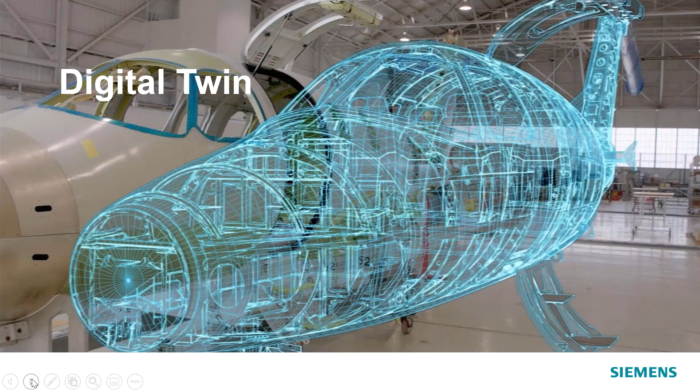They are able to do this by breaking down silos between the different domains and increasing communication, in particular, the mechanical and electrical domains.

Capital delivers a solution for the whole vehicle or aircraft lifecycle. On the left, you'll see it drives a full embedded software flow through to software running on ECUs in vehicles. On the right, it covers the electrical system design. It continues supporting engineers through harness manufacturing, engineering, and in-service publication creation.

Capital is data-centric and built upon a data and process backbone to enable extremely high levels of automation, data coherency, and integration with adjacent domains such as mechanical design. This electrical data management system enables the traceability and change and configuration management that customers demand. And because the electrical systems are part of a wider program lifecycle in organizations, we provide deep integrations into PLM systems such as Teamcenter and other necessary domains throughout the product development process.

With the exploding complexity of electrical systems, development happens in the context of model-based systems engineering. To deliver this, we integrate with other domains to deliver a truly integrated system development, including MCAD, PLM, and ALM systems.

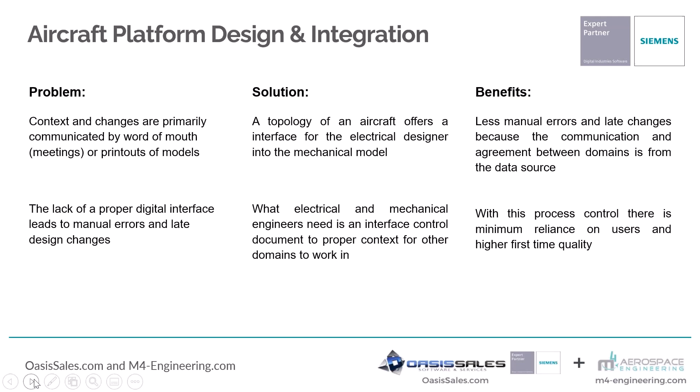Now that we understand the problems and what the solution should look like, we'll talk about how we can achieve this using the Capital software.

In Capital, we start with a system-driven design approach where we begin with nets or signals, and using Capital's automations easily create the wire abstraction. This includes the generation of harness-side connectors, including modular ones, which are becoming more and more prevalent in the aerospace industry. We then use these same wiring schematics and synchronize them to a 2D aircraft topology that allows you to reconcile differences between the mechanical and electrical design.

The topology abstraction allows an electrical engineer to work with the mechanical content within the context they understand and are most familiar with. This automation and correct by construction design ensures an optimum design process.

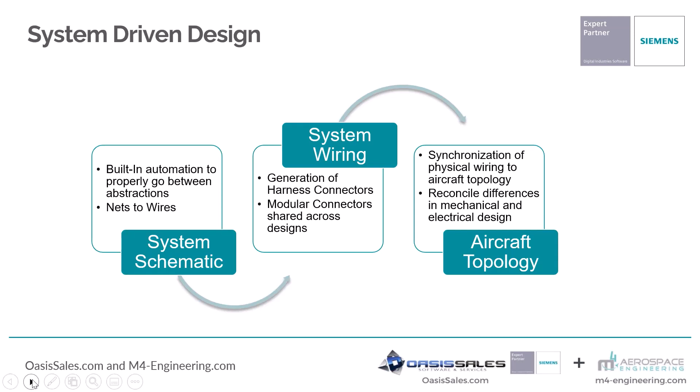Some of the automation capabilities used in this part of the process are the conversion of nets to wires, wire naming rules that allow you to auto-generate wire names based on given parameters, automatic creation of harness-side connectors, including modular connectors like I previously mentioned, and traceability of wires through different diagrams and systems.

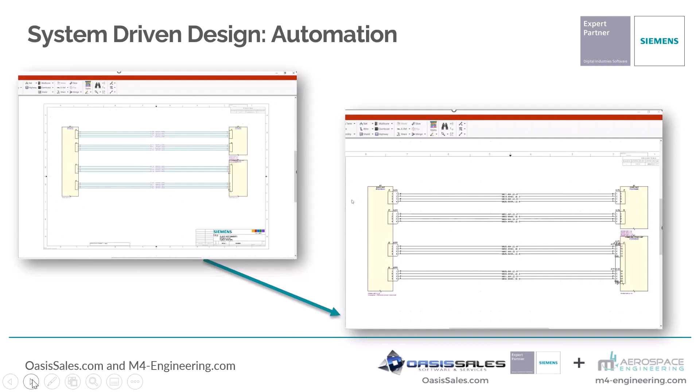These wiring schematics can then be mass imported into the topology, which we will see in a video during this presentation.

The next step in the electromechanical design process would be to sync the wire schematics with the 2D mechanical topology to validate the physical wiring.

Once we have the physical wiring schematics and we've synchronized the topology view, we need to feed back mechanical data, specifically inline connectors that might need to be added back to the wiring schematics. These are placed in the context of the physical aircraft, or any vehicle for that matter, and accurately added to the appropriate system's wiring schematic. We will see this in the following video.

Here we are starting off in the topology plane with a UAV aircraft that has been brought in from NX. The wiring schematics have already been synchronized, and we can see this by the list of wires on the left. We can also trace back to where these originated by tracing back to the physical source. This will take us back to where the wire originated, which is in the schematic.

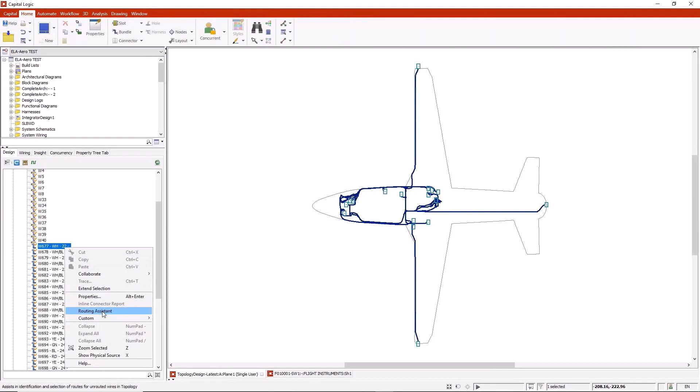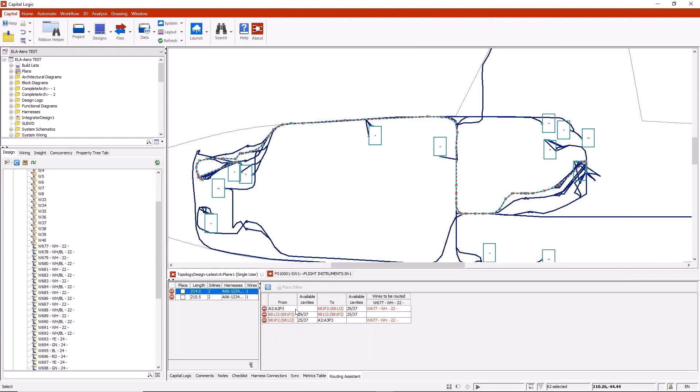Back in the topology plane, we can see that we can trace the paths of the individual wires. The list of wires on the left is a list of unrouted wires, but we can use our routing assistant, the dialog box you see pop up on the bottom, to complete the routing of these wires. Here it's telling us that the specific wire we've highlighted, in order to go from device A2 to A3, needs to travel through two different bulkheads or inline connectors.

We can also run the routing assistant on the connector pair itself to view all of the wires that need to be routed through the particular inline pair. There are actually 8 wires that need to route through the inline pair, so we can go ahead and complete the route for all 8 of them.

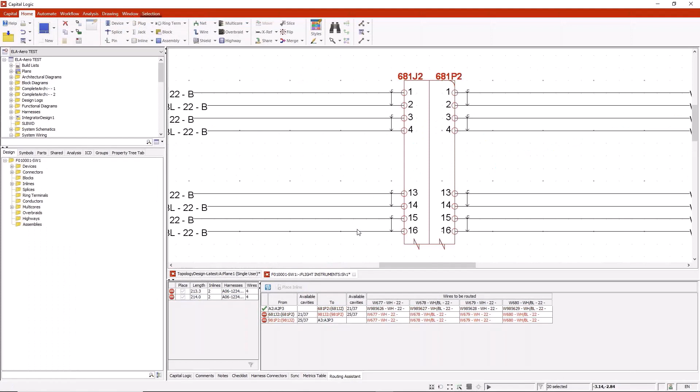We do this by choosing the Place Inline Connector button, and then the information is transferred back to the wiring schematics. You can see now that the inline pair we chose to route the 4 wires through has been added to the schematic. We know this is the correct path because we've seen it in the context of the aircraft topology.

Coming back to the topology plane, we can see there is another inline pair that these wires need to route through in order to complete their route. We can run the routing assistant on the connector pair itself to see what other wires need to run through the pair to complete their connectivity.

We can also run a connector report, which allows us to see the cavities we have available and compare them to the wires that need to run through the connectors to make sure we have enough space. We can also make sure we have the correct size cavities for the wire sizes that need to run through the inline pair. If we don't have enough space, we can communicate this to the mechanical engineer and either change the connectors at this bulkhead or add more inline pairs to create an alternative route.

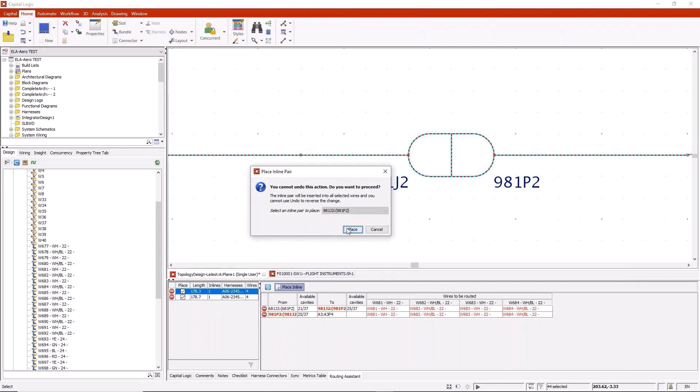Here we had enough space, so we can go ahead and place our inline connector back in the wiring schematic. Here you see the insertion view of the connector, and we can see what wires are going through each cavity. This is handy because, say you're routing a multi-core twisted pair, you can adjust which cavities the wires go through and make sure the multi-core wires route through adjacent cavities.

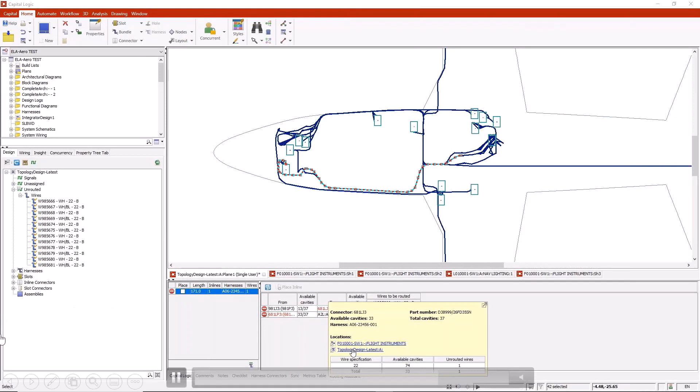Coming back to the topology view, after we've synchronized and updated the information from the wiring schematics, we can now see what wires are still left to be routed. Once we route the last set of wires through the last pair of inline connectors, the inline will be placed back into the schematic, just like we did with the other inline pairs, and we'll go ahead and complete the connectivity for all wires.

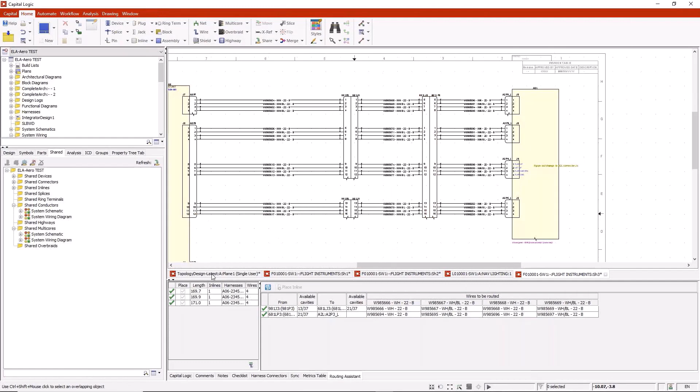Back at the schematic level, we can go ahead and clean up the schematic by merging any connectors that have been sliced up. For an electrical engineer, being able to work on the electrical connectivity within the context of the aircraft or vehicle makes it easier not only to update information, but also to communicate any changes required across domains. Back at the topology level, we see we have no unrouted wires, so we have completed our connectivity.

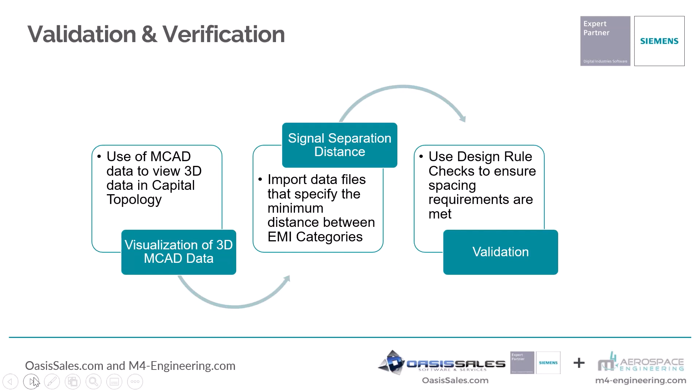Another capability within this flow is being able to view the relevant 3D data within Capital to aid in the visualization of EMI categories and better meet signal separation requirements.

We begin by importing a signal separation file with minimum EMI category separation distances. Then we can use the 3D viewer for signal separation to be able to see the other plane. With the use of the minimal distance file, design rule checks will show if any of these are violated, meaning if there's a wire traveling along a bundle that does not allow it to meet the EMI specification distance.

Viewing these results in the output window, which is interactive, takes you to the specific path violating the rule, allowing for easy manipulation to reroute wires, just like we saw in the video before.

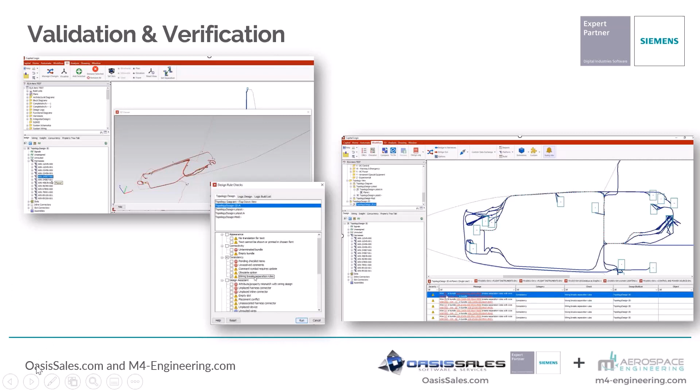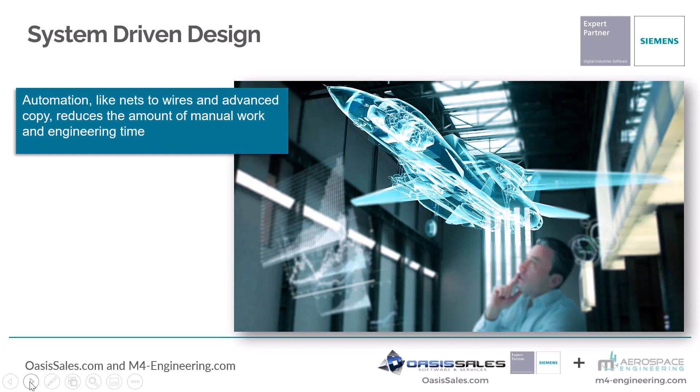All in all, what we are really doing is establishing a full digital thread throughout this flow. We are able to collaborate better, access data more efficiently, and make well-informed decisions to accelerate the development process. By creating the digital twin, we are able to iterate designs, thus improving first-time quality without increasing cost. As you saw, we are able to get a complete idea and validate without ever going to manufacturing, reducing the chances of late design changes or issues coming up that might halt or end a program.